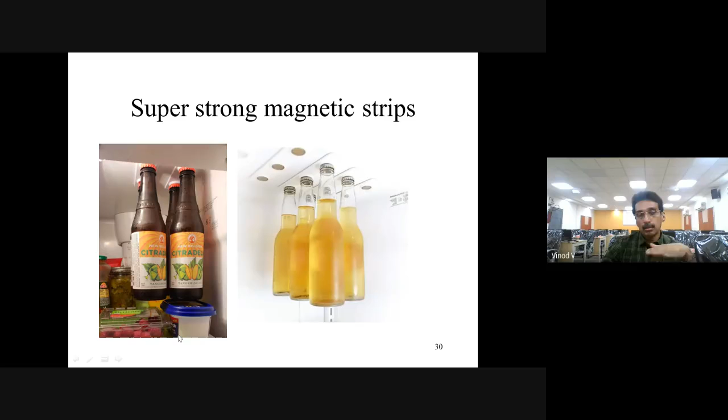Magnetic strips are there. Normally we place these bottles on the racks, especially at the bottom side, but you can hang it like this if you are providing magnetic strips.

So like that, these are the products people are making, and people are taking patents for this.

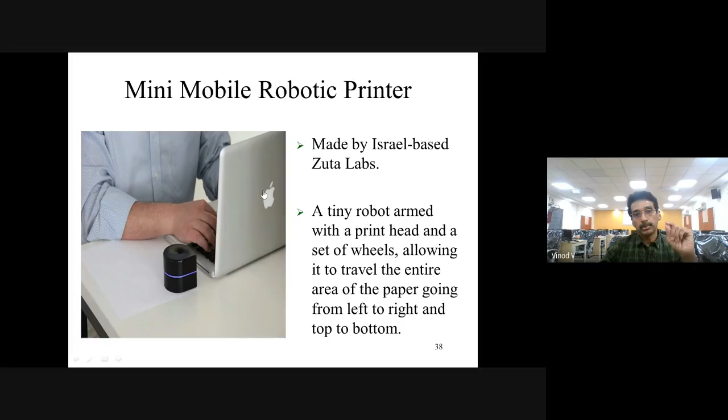Then there's a mini mobile robotic printer. Normally with printers you've seen, paper goes inside and comes out, the printer is stationary. This takes the reverse approach: the paper is stationary, and the printer moves. The printer moves along the paper, and when one page is over, it gives a signal to the computer so you get a display to place the next paper. You place it exactly at the top.

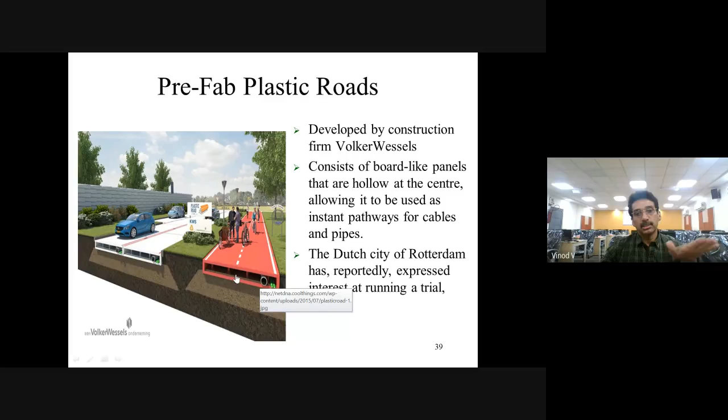Next, prefabricated plastic roads are available, especially in Rotterdam. If you want to lay a road, these things are already available. You can lock them like this and make a road. Only a surface is required, and through the inside part you can lay cables, with a provision for that.

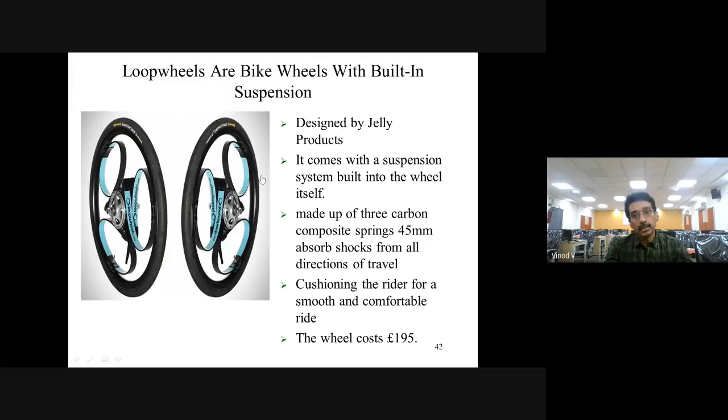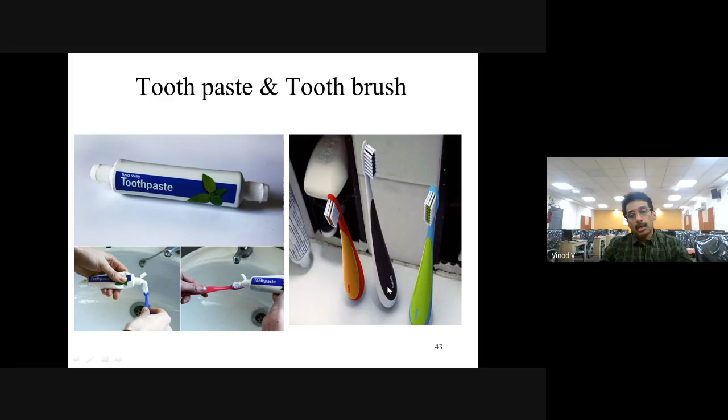One normal and one herbal, both openings are there, and you can see these toothbrushes. These are all having their center of gravity kept at the bottom side. Normally it will stand individually, you don't have to have a holder for that.

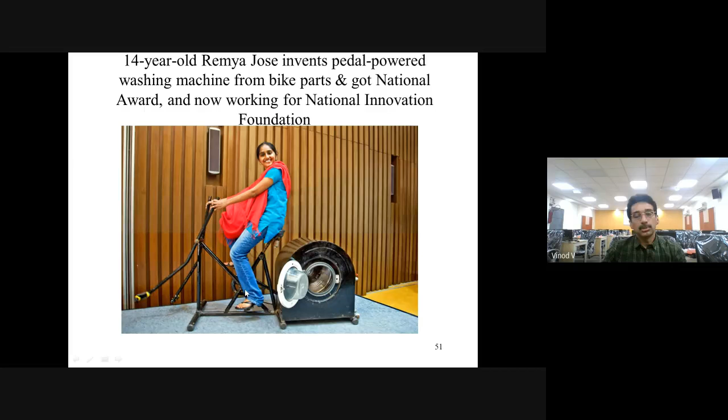This is 14-year-old Remya Jose, who is from Kerala, and she has invented a pedal-operated washing machine, which she has made from bike parts, and she has got a national award for innovation. Right now she is working for the National Innovation Foundation. You can see, here they will be having a washing machine, it will be pedal-operated. So if you are doing exercise at the same time, you will be able to wash your clothes.

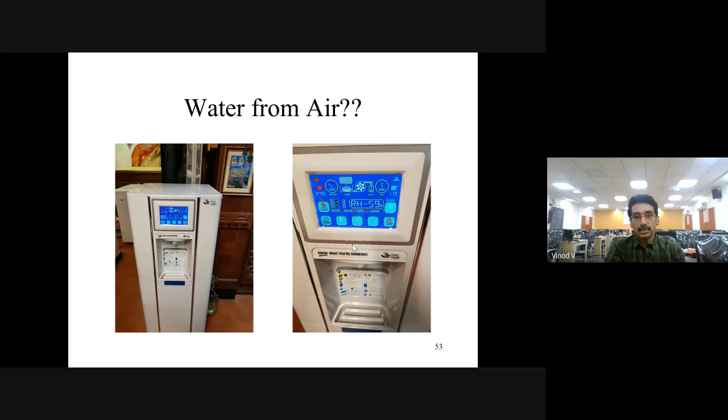Then, regarding frugal innovations, it's about creating advantage out of a constraint. A lot of frugal innovators are there in India, they have come up with several designs, and it's faced with scarce resources, institutional voids, frugal innovators.

They have developed radical solutions for the problems, so we'll see one by one. They don't have much technical knowledge, but still they come up with inventive solutions for the problems.

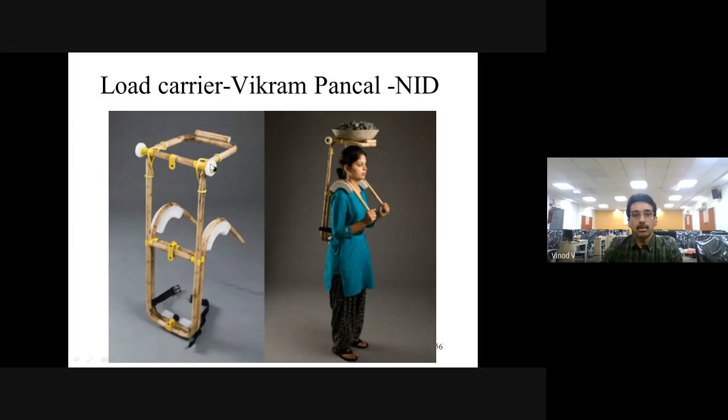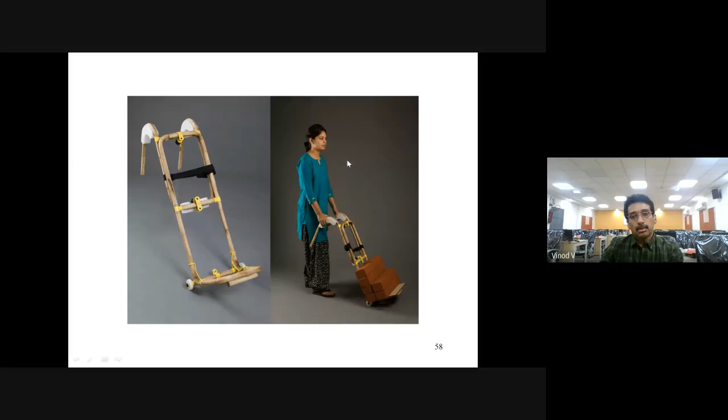Here a roller is there, and a holder with a sponge at the top where we can hold it. The same item can be used for different applications, like this, and also as a trolley. So these are multi-purpose designs, the same item with different uses.

Innovations in materials and methods: people are making mud houses. There's a person from Kollam, an architect, who was from TKM College of Engineering, head of the architecture department, Eugene Pandala. He used to make a lot of buildings out of mud. Similarly, our architect Shankar is also making mud buildings in Habitat Group.

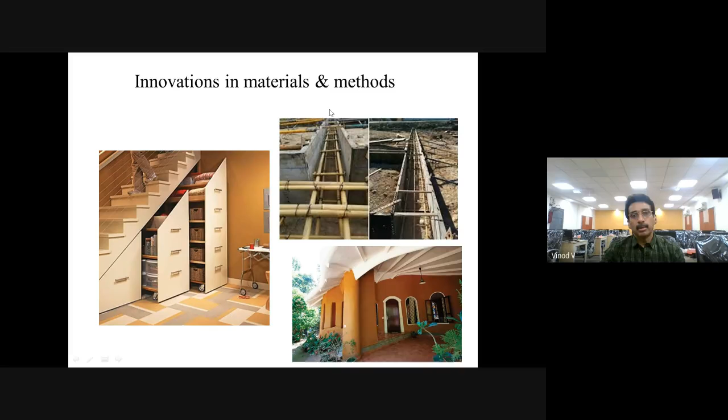This is how people are using innovative things for storage applications. Here you can see, instead of iron bars, people are using bamboo even for concrete applications, and it's still useful. This is IIM Bangalore, where you can see buildings like this; they have protected this particular tree. See how creative these people are. Creativity exists everywhere; you just have to identify the location and use it accordingly.

Now, in general, I'll just take 5 more minutes to show you some of the inventive projects done in our college and some patents we have already published.

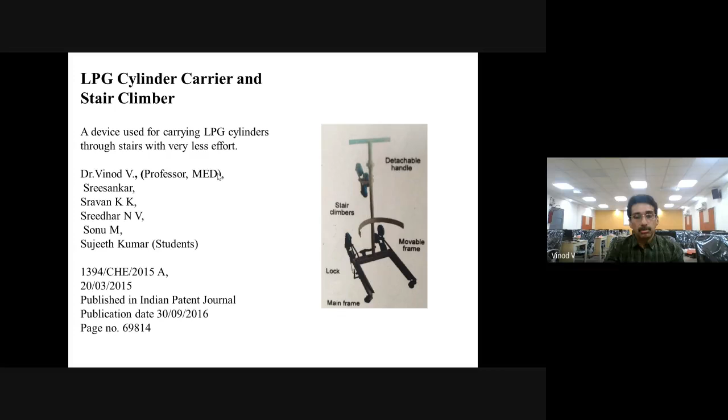This is one of the LPG cylinder carriers we have designed. If you want to take an LPG cylinder from one place to another, normally you hold it at the shoulder or rotate it. But how do you take this cylinder from one floor to another? We can directly use this item for transporting it through the steps. So that is what we designed it for, an LPG stair climber.

Another thing we designed, and for which we have taken patents, is this Huxley compact private vehicle which can be used to carry two individuals with around 150 kg payload capacity.

A small drone powered by two engines. Normally we have seen smaller drones, but this one is bigger, about 1.5 by 2 meters in size. Persons can sit inside it and it will be able to lift off. It will be useful especially during floods and evacuation applications. We developed this with the help of KSCSTE, and it was around 8.8 lakhs. KSCSTE gave a research grant for this project, and this student is right now in Germany doing his MS. Fayad.

So we can do this, students can also do it, you can incorporate students into it, and faculty can support these things.

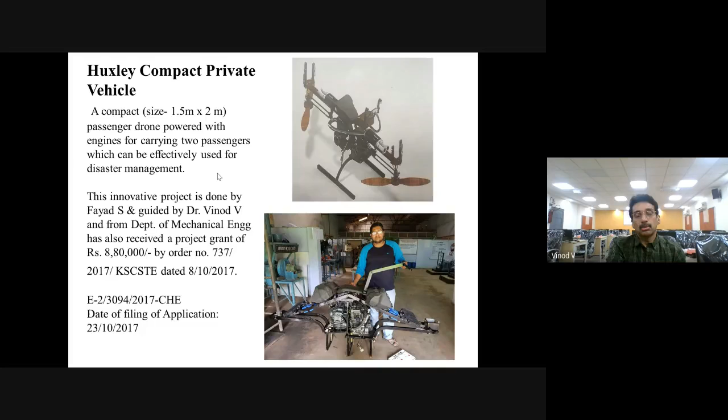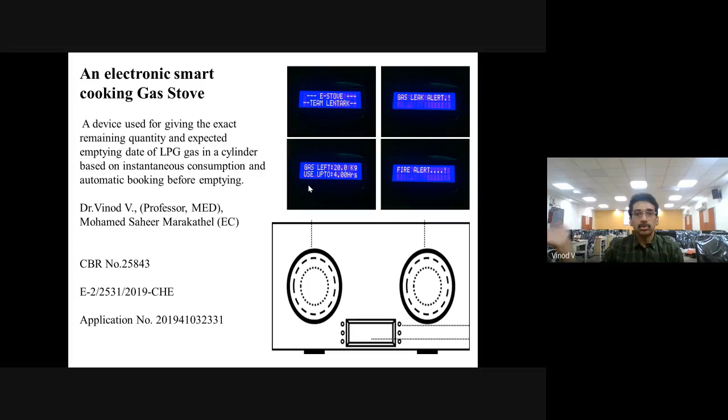This is another inventive product, an electronic smart cooking gas stove. When using a gas stove, suddenly one day the gas gets exhausted and we don't know when it will happen. So this device exclusively monitors how much gas is left in your cylinder, how long it will work, and what the present consumption rate is. It also books a new cylinder automatically, based on the delivery time. For example, if delivery takes 5 days, it will book 5 days before the gas is expected to exhaust, so the new cylinder arrives right when the old one runs out.

Myself and Saheer did this project, and for it he won the Big India Challenge competition, and also the IDC award from the Institution of Electronics and Telecommunication Engineers.

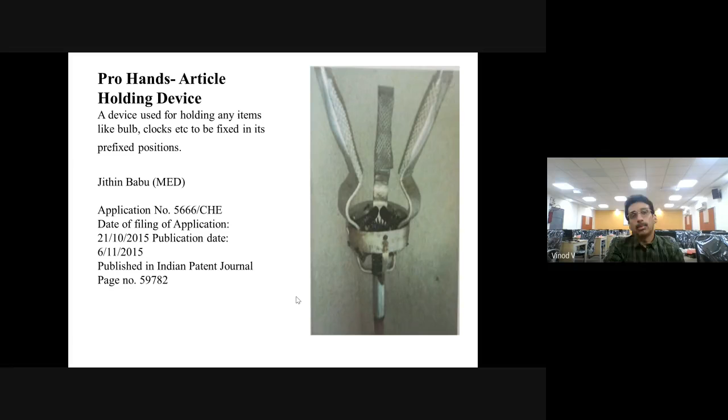This is a Pro Hands device, as I've already told you, by Jithin Babu, for holding items like a bulb or clock placed at the upper end. We can directly remove it or hold it like that.

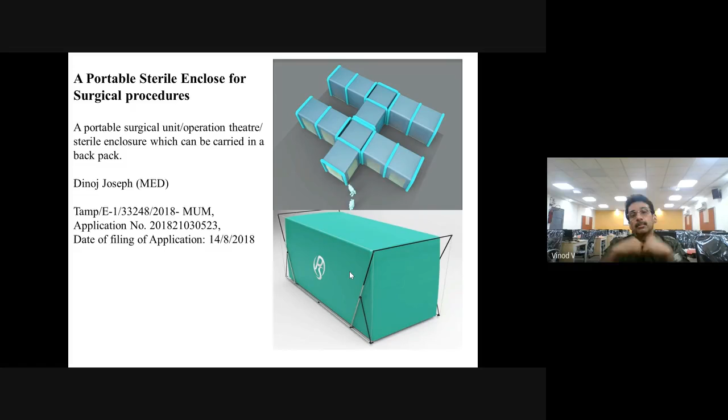We are having an intellectual property rights cell, and in this particular cell, over the last 5 years we have published around 10 patents. This is the maximum number among the engineering colleges as per KSCSTE. We have also received the best IPR cell award from KSCSTE in 2018.

Safik sir and Ajit Prabhu sir have contributed a lot for making us come up to this level. The support given by KSCSTE is immense and we have to leverage out of it. So I thank these people from KSCSTE, especially Safik sir and Ajit Prabhu sir, for giving us an opportunity for doing this IPR cell and for all these innovations.